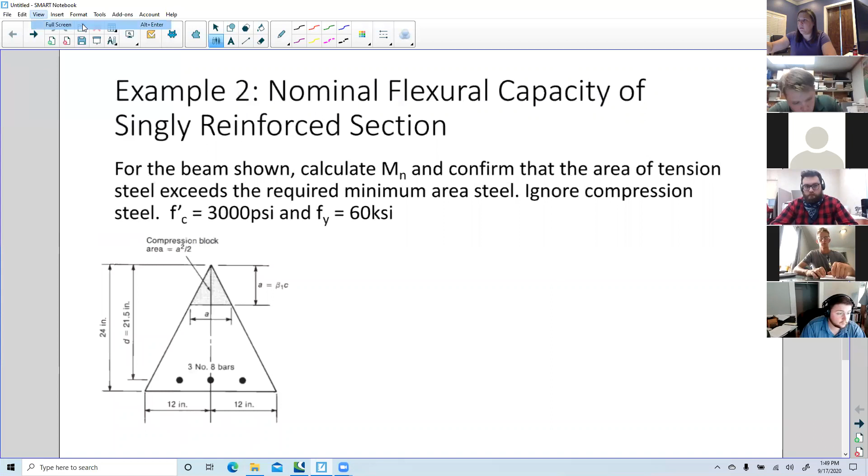So, what do we know? We know...

Our F prime C, that's our compressive strength, 3,000. Our yield stress of our steel is 60 KSI. And our area of steel, we have 3 number 8 bars, so I have 3 times the area of a number 8.

Anybody want to guess what that is? Look it up. 0.79. Yep, 0.79. Right. Again, that's one you might end up having memorized at some point. So our area of steel is 2.37 inches squared.

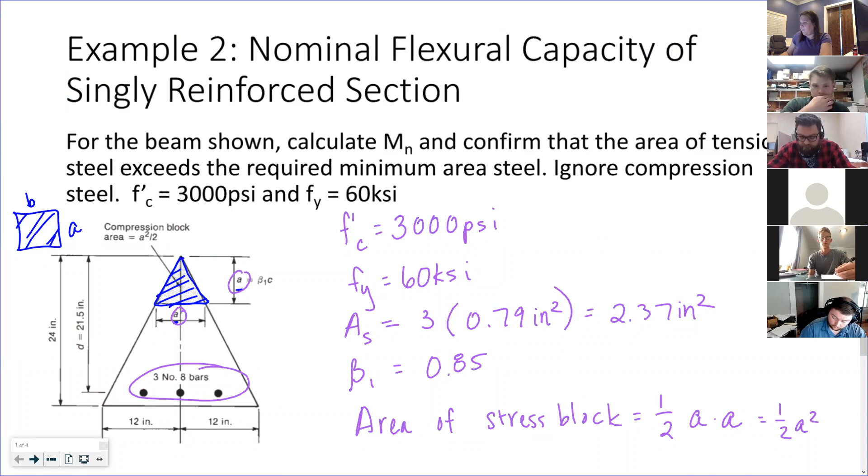This is straight out of the book, but if I look at my strain profile, I'm still going to assume that the very tip has a compressive strain of 0.003. That's the maximum compressive strain of concrete.

That line needs to, that's my steel, right? My depth of my steel. And my steel, which is luckily all in a line, we're going to assume it has a strain equal to or greater than the yield strain, so that my steel has yielded.

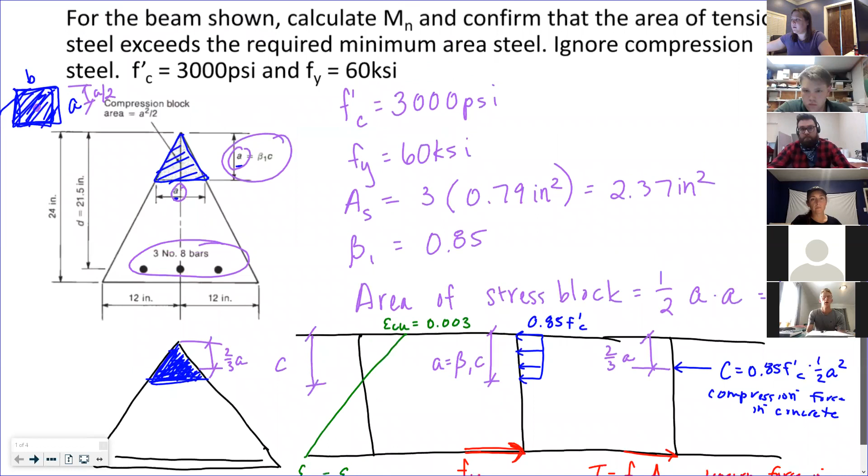Well, I was 10 minutes late because I didn't get the Zoom invitation, so I'm wondering what page you're on. Oh, it's on something I didn't give you guys. Take a minute and copy it down. It's this page right here, I didn't give it to you guys. Oh, it's one of the blank ones. Yeah, I forgot to include this. Okay, I'll just screenshot it. Oh wait, never mind, I don't know how to do that. I'll copy it down, take a picture with my phone. Gosh. I can't email it to you because I'm on my... Okay, we're good.

So we're just applying this, instead of using a nice rectangular cross section, we're looking at something funky. This is going to help on the last problem of the homework.

Okay, so my next step is I'm going to set C equal to T, because my cross section has to be in equilibrium.

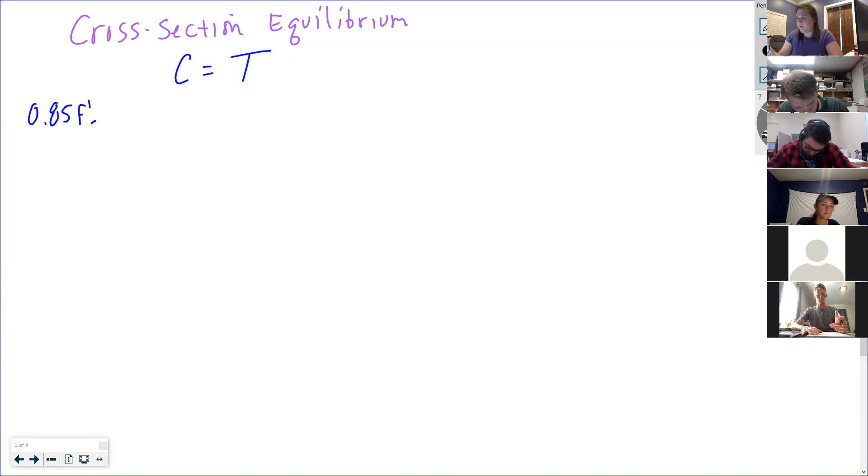So I have 0.85 F prime C times 1/2 A squared equal to AS times FY.

I guess I should say that's the C sub C for compression in the concrete. There's never tension in concrete, but there could be compression in steel.

So if I look at this equation, I know F prime C, I know AS, I know FY. The only thing I don't know is my A. I'm going to solve for that.

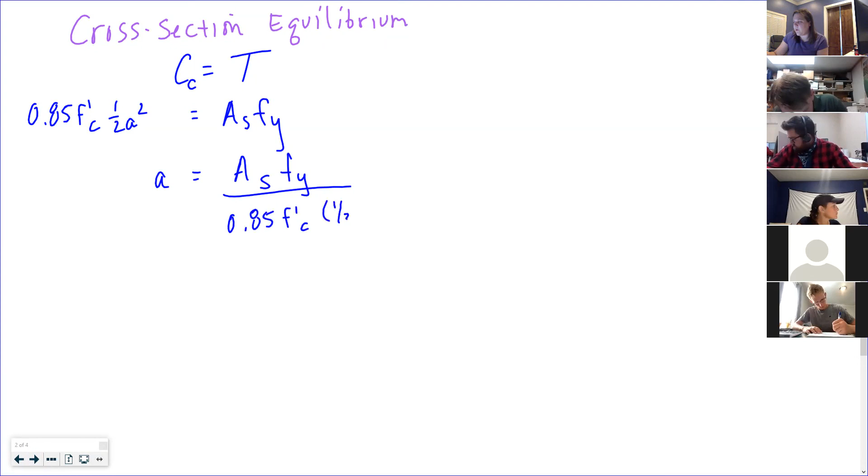My area of steel was 2.37. Yield stress is 60 KSI. I'm going to put my F prime C in KSI so I can cross them out, so 3,000 PSI, that's 3 KSI.

Should get a value of about 10 inches. Is that right?

Okay, so for rounding on homework and stuff, do you want us to go to 1 decimal, or... I typically go to 2, doesn't matter. That would be fine, this is kind of an intermediate calculation. So I would actually probably keep that number in my calculator and move on. Your final answers though, I guess you just want to the nearest KSI.

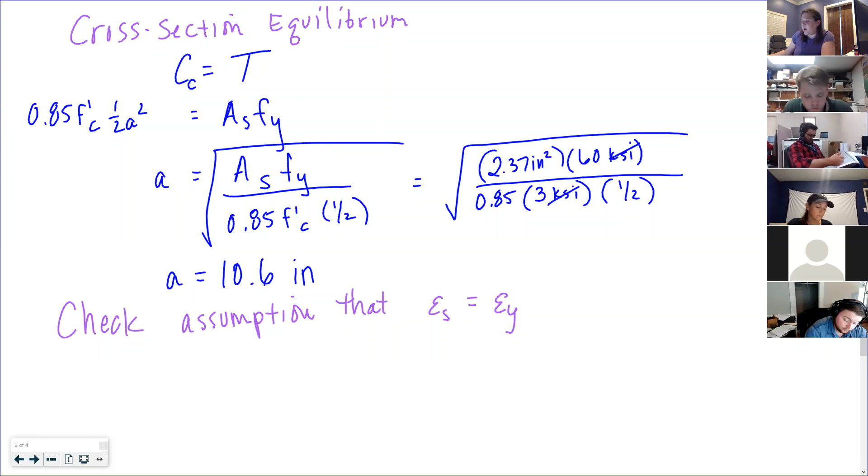You can't get away, you have to calculate A and B, or A and C, but I'm gonna do it right now. So I assumed, I'm just gonna draw this again, you don't have to if you don't want to.

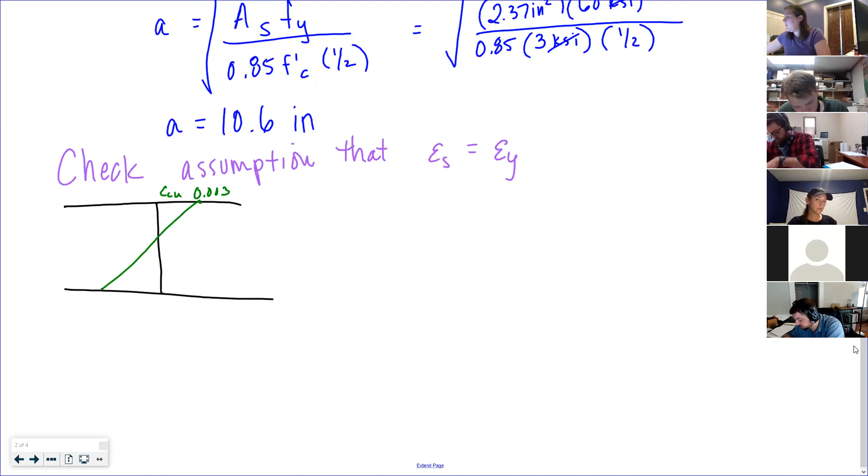I assumed a strain profile. No matter what, this is always going to be 0.003. This distance right here is the depth of my neutral axis C. This distance here is the depth from the extreme compression fiber to the centroid of my steel, which is D.

What I want to know is what's my value of the strain in my steel.

So I can calculate, right? A equals beta 1 times C. So C equals A over beta 1. I got 10.6 inches divided by 0.85. So the depth of my neutral axis is 12.4. It's like halfway down.

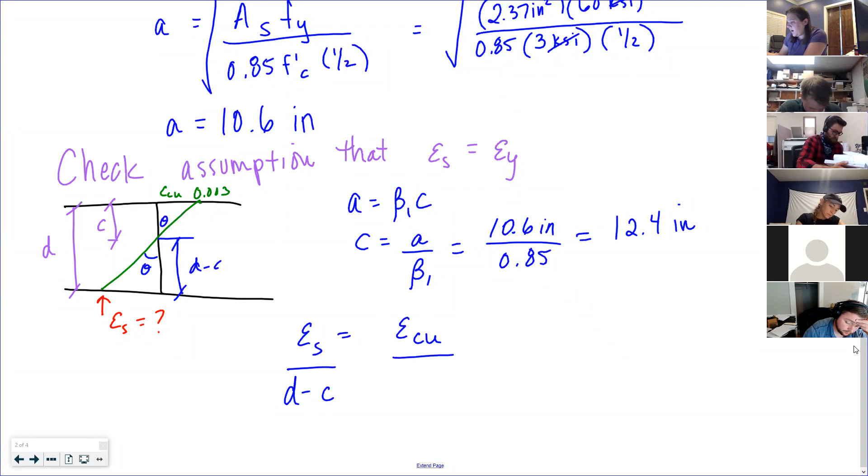So I can use similar triangles to solve for the strain in my steel. I think I wrote this down in the notes. ES over this distance, D minus C - that's one triangle, because these angles are the same - is equal to the ultimate strain in my concrete divided by C. And the strain in my steel is the strain in my concrete times D minus C.

0.003 times D, which was 21.5 inches.

Two one nine two two, however you rounded it.

So 10 decimals, just yes, please, 10 decimals. No, don't use 10 decimals. I will kill you.

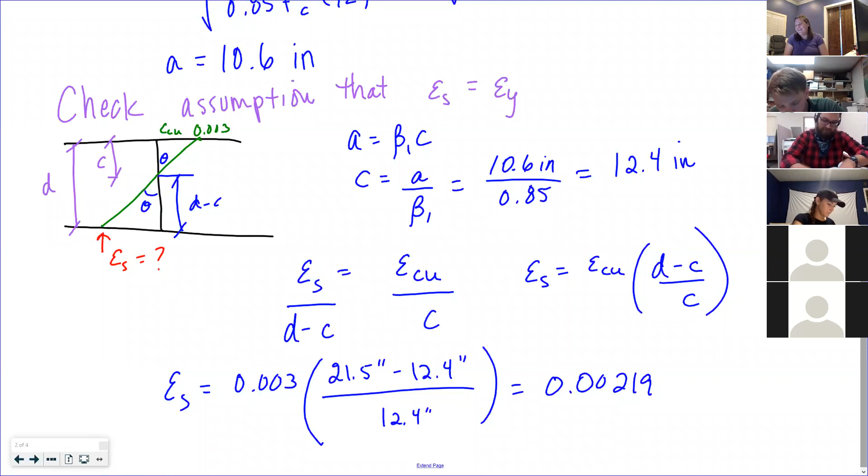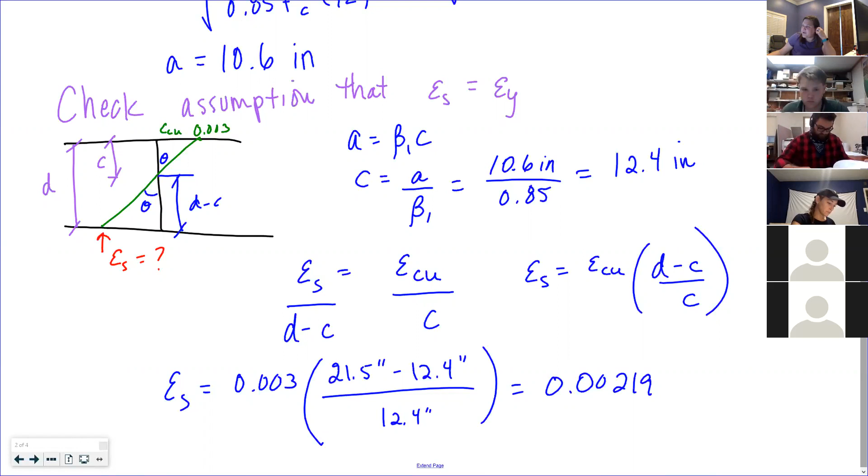So if you start to, because after a while you might remember that for 60 KSI it's 0.00207, but let's just derive it. EY is my yield stress divided by the elastic modulus of steel. So 60 KSI divided by 29,000 KSI should be that. So I just barely yielded, but I did.

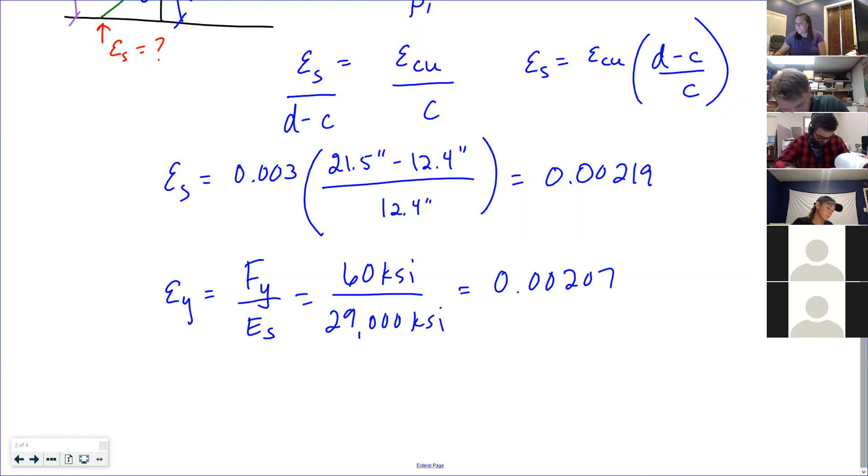All right, yes, ES is greater than EY.

And since I yielded, that means I can use the yield stress Fy. I don't have to go back and redo any calculation.

So can you talk through again what we would do if you didn't yield? What would, you'd have to go back and recalculate FY? Yeah, it would. Is it bad that I'm trying to remember?

I think you have to do an iterative process because you have to guess it, like your A, how do you recalculate it? A given though? FY is given to you.

Yes, but that's assuming your steel has yielded. If your steel hasn't yielded, then the stress in the steel is not Fy, it's something slightly less. So I went up here and calculated this A in my equilibrium, assuming that the stress in the steel, right, my tension force is really the area of steel times the stress in my steel. Since I'm assuming it's yielded, I'm assuming that's Fy. If the steel hasn't yielded, then the stress in my steel is going to be something less than that, so I have to go back and calculate a new A.

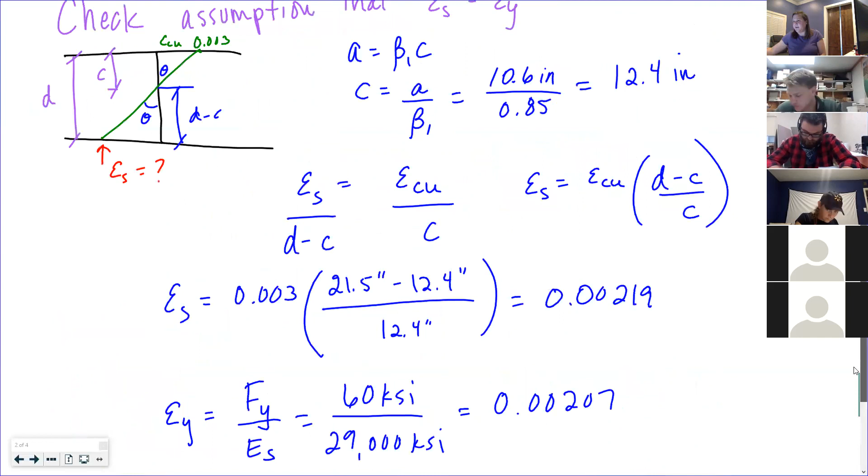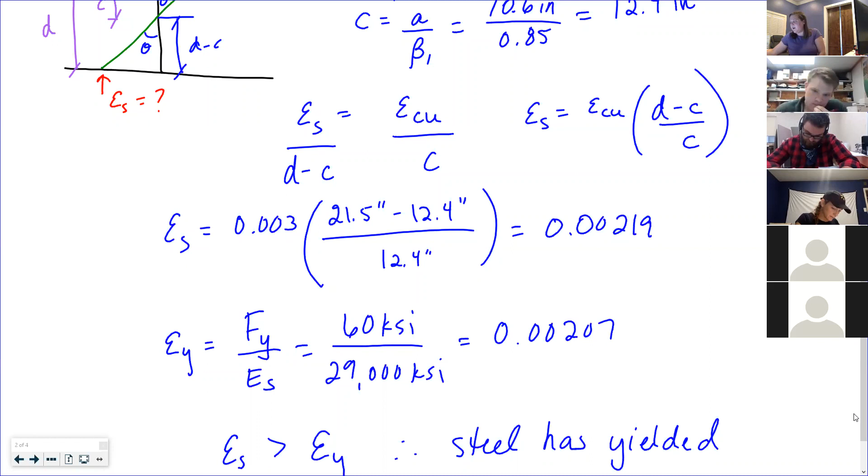Like in this instance, I would use this, or in that instance, not this instance. Okay, I have a strain. From that strain, I can calculate a stress.

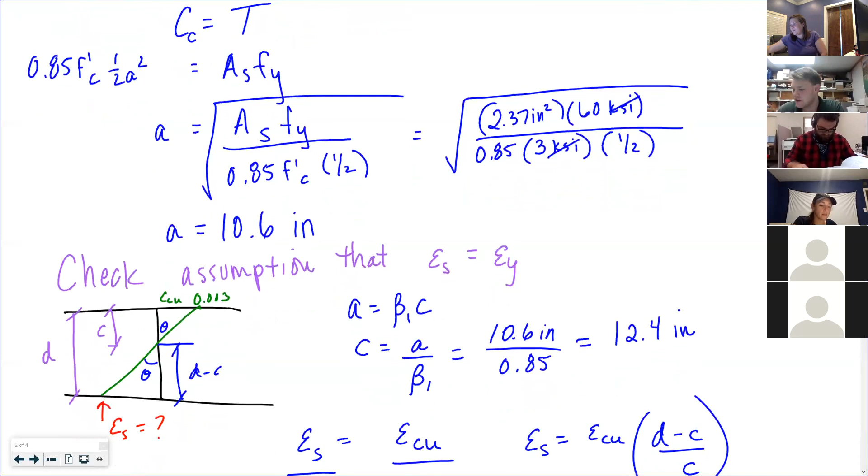Yeah, that sounds terrible. Let's not do that on a test. Well, I don't say I wouldn't do that on a test, but so we haven't done any examples that way yet, so I wouldn't make you do that just yet.

But also the ultimate goal would be that you want it to yield, because then your a tension controlled section. Because if it hasn't yielded, then you might fail in compression first, meaning you're going to have a more brittle and a more sudden failure than a ductile failure.

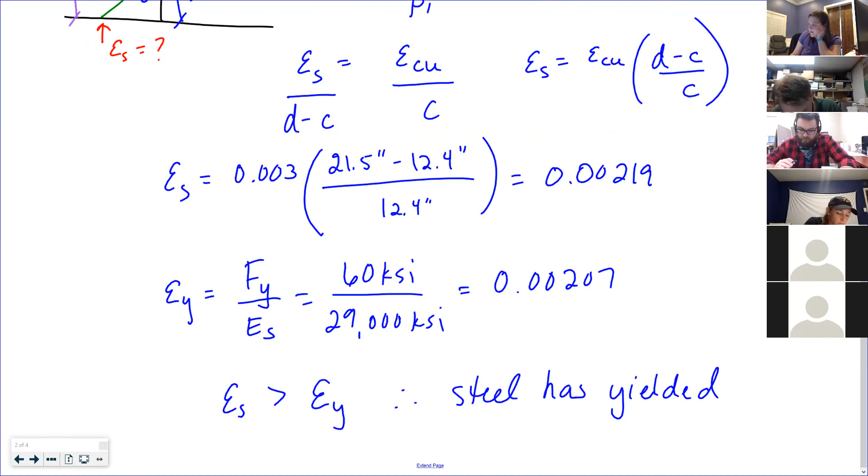Now, obviously, a concrete column, the steel is going to be in compression. But a beam, it's not going to be. So our question now, so we yielded our steel, so we can go.

We can check that we have the minimum amount. This is really something that is more appropriate when we're on the design side, but it's good to get that check in there. Right now, all we're doing is something's already designed and we're making sure it works.

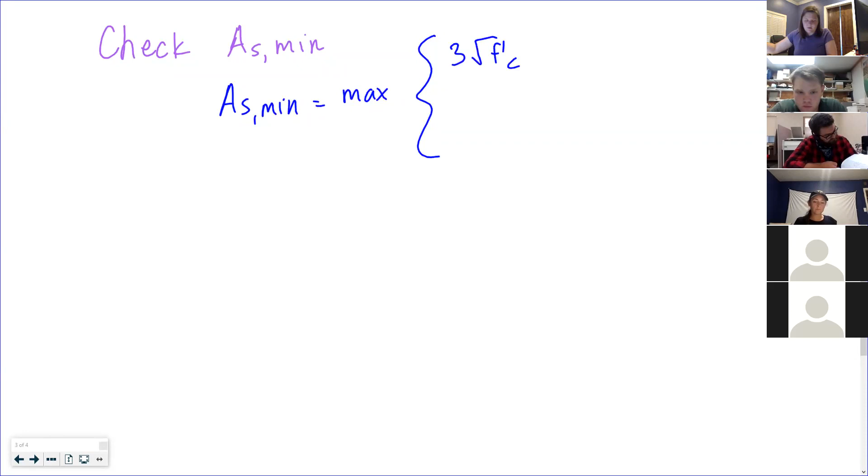So on page 135, good tab to have is our AS min. That's the maximum of 3 times the square root of F prime C over Fy times the width, or 200 over Fy.

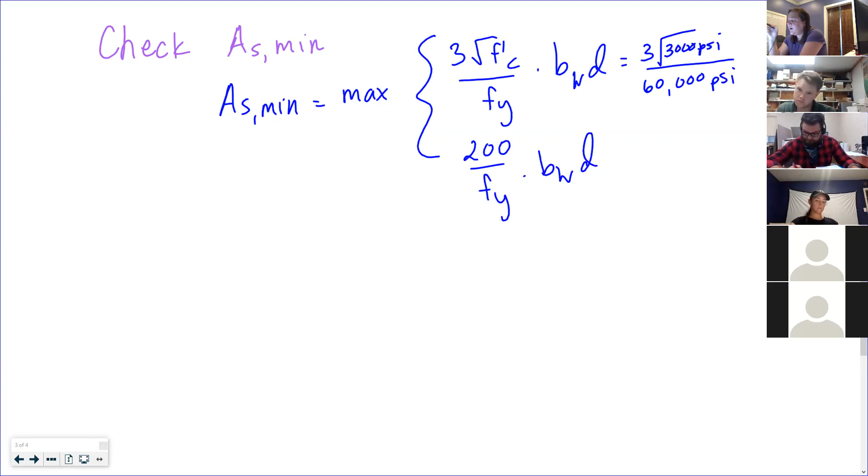So really, you need to figure out if 3 times the square root of F prime C is greater than 200. But the maximum, like 3 times the square root of 3,000 psi, and I'll say it every time: when your F prime C is under a square root, it has to be in PSI, and the answer comes out in PSI. It makes no mathematical sense, okay, but it is what it is.

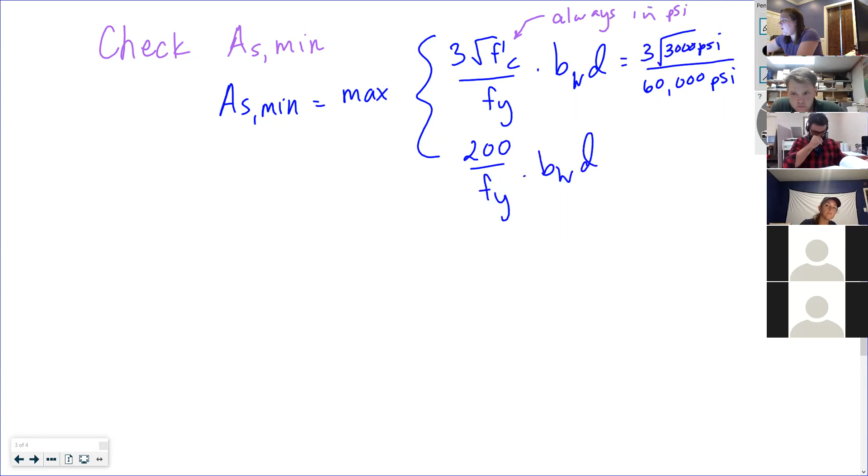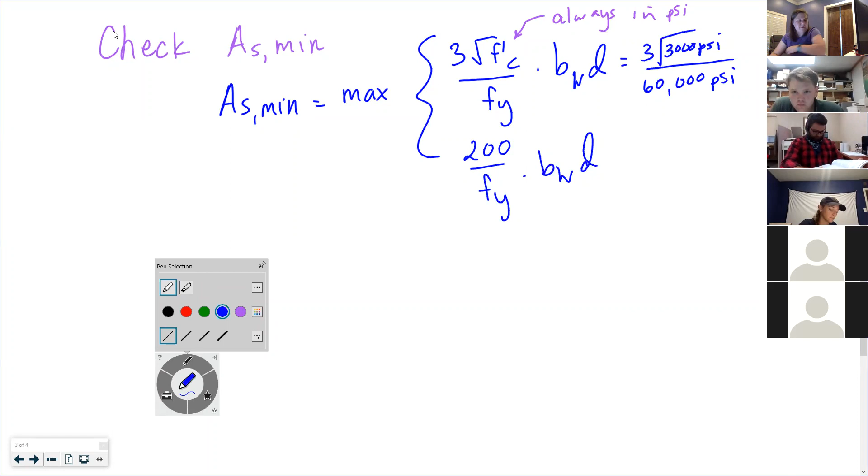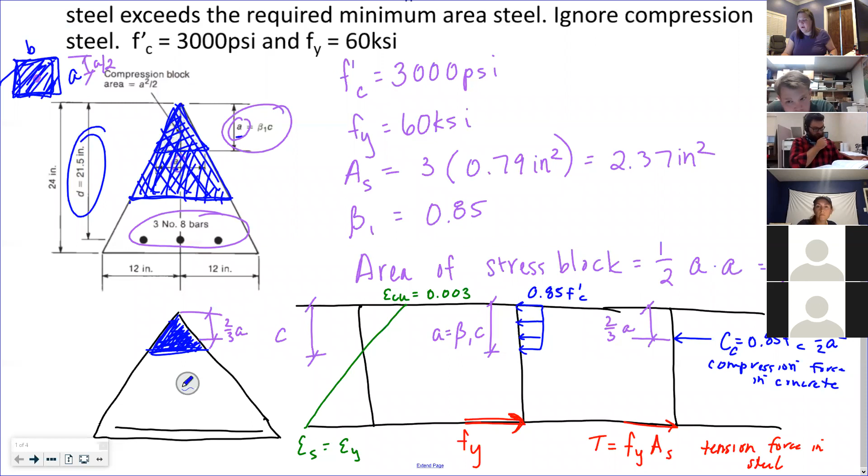And the width, well, this is a variable width. We have a triangle, but it would be safe to assume the maximum width is conservative. You could use an average width, but we can use the maximum width because that would give the highest value. So the width is 12 plus 12, 24 inches, and my depth is 21.5 inches.

Same thing here, 200, again, that's in PSI, even though it doesn't say that in the thing. So my minimum steel that I need to have, based on the dimensions and the material properties, is the maximum of those two values.

And my AS was 2.37, so I'm good there. Greater than 1.72.

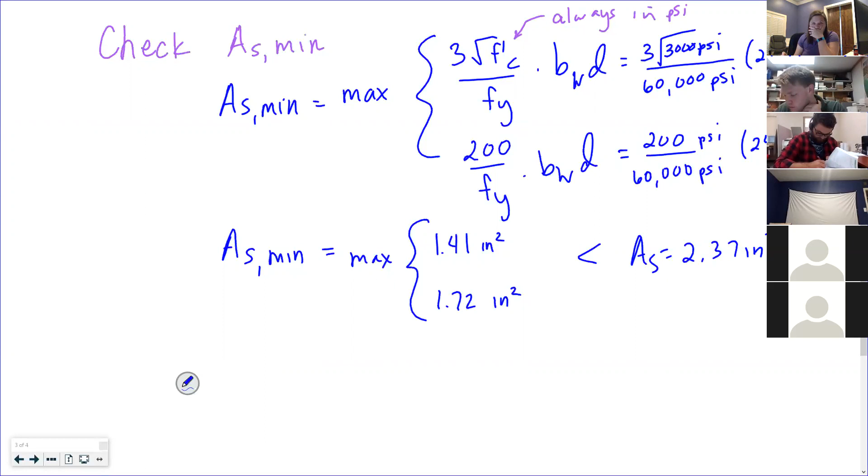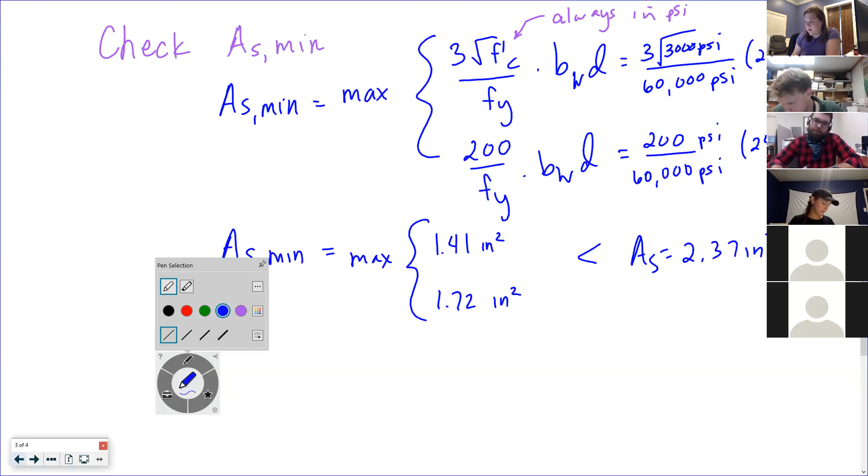Now, what they actually asked us to do was calculate our nominal capacity. And my equation for that is, I have this force couple. I have a compression force and a tension force, and I need to take the moment about one of them. The force couple caused the moment.

It's nicer to take the moment about C sub C because there's a lot less variables in the tension, at least right now. So I need to know the distance between the two, which is D, the whole overall distance from the extreme compression fiber to the centroid of my steel, minus 2/3 times A.

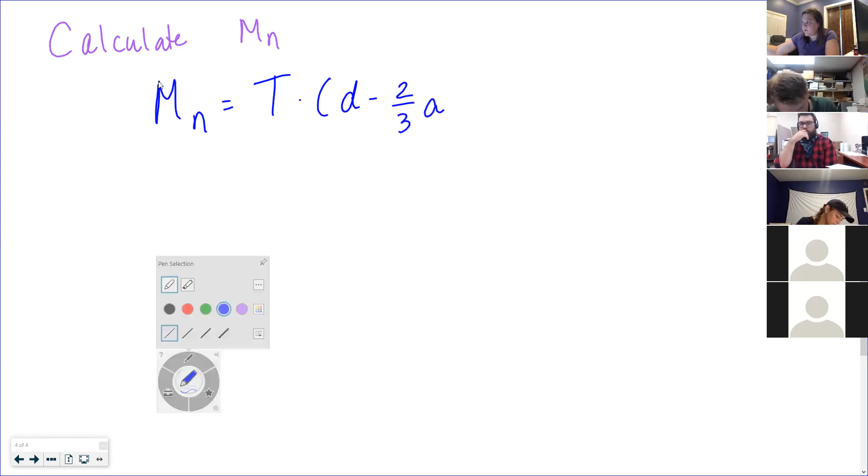Or the whole distance is D, I need to subtract that 2/3 A. That's the moment arm between that force couple. So if I take the moment about the C sub C, it would be: my nominal capacity is T times that moment arm, which is D minus 2/3 A, or AS FY times D minus 2/3 A.

So my area of steel times the stress in that steel, which is the yield stress, so 60 KSI. The moment arm, which is D, 21.5 inches, minus 2/3 A, which was 10.6 inches.

2.37? Yeah, 2.37. Making sure that I got the right number. Got like 2052, something like that.

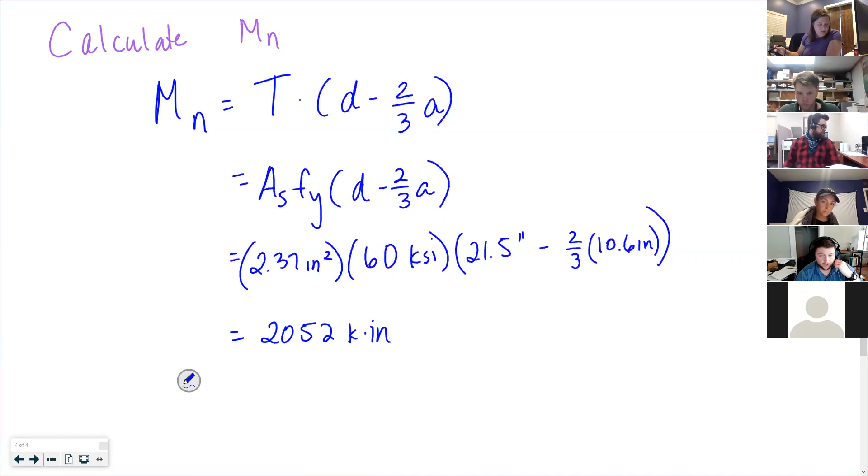Oh, thank you. Mm-hmm.

If you're following along in the textbook, I found an error with their units. They have pound-inches, but it should be kip-inches. If I have kips per square inch, that unit cancels, leaving kips times inches. Divide by 12, and you get 171 kip-feet.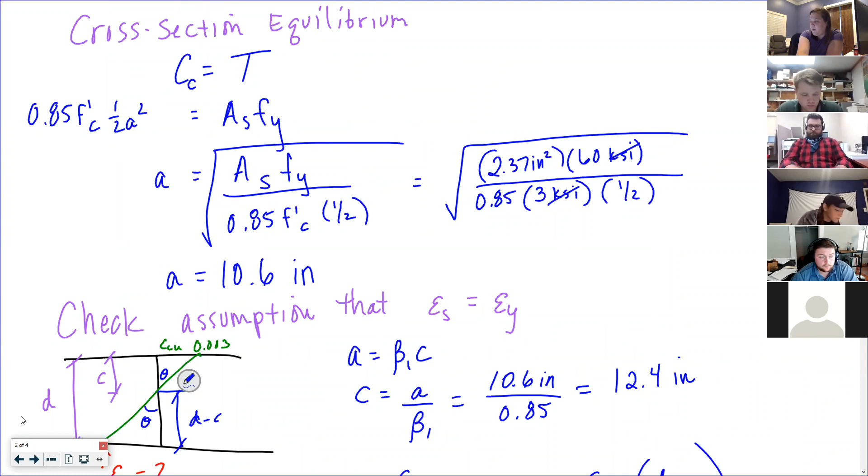As a result, some things change, but the principles are the same. It's still 0.85 F prime C, but the area, instead of being AB, is just 1/2 A squared. The location, instead of A over 2, is 2/3 A, because it's a triangle. This just means a slightly different equilibrium equation and a slightly different moment arm. Instead of D minus A over 2, now it's D minus 2/3 A.

So did you use 10.6 in your calculation, or did you use the full number? I used 10.6. That's why I'm asking, because I would have gotten 4 kip-inches more since I used the full number for A. That's okay.

You can use like 10 digits if you want, it makes a difference, doesn't it? But what would that be like? Still rounds to 171 kip feet though.

2052, or is that what you got? I got 2056 and some change. Right, divided by 12, it's still 171.

And if you're that close, like if your maximum moment that you need to carry is 2059, maybe you should change some stuff, right?

Because we're gonna multiply this by phi next. That's gonna be the next little video to watch, because that's what you have to do on the homework too, since the phi factor varies depending on if it's tension controlled or compression controlled.

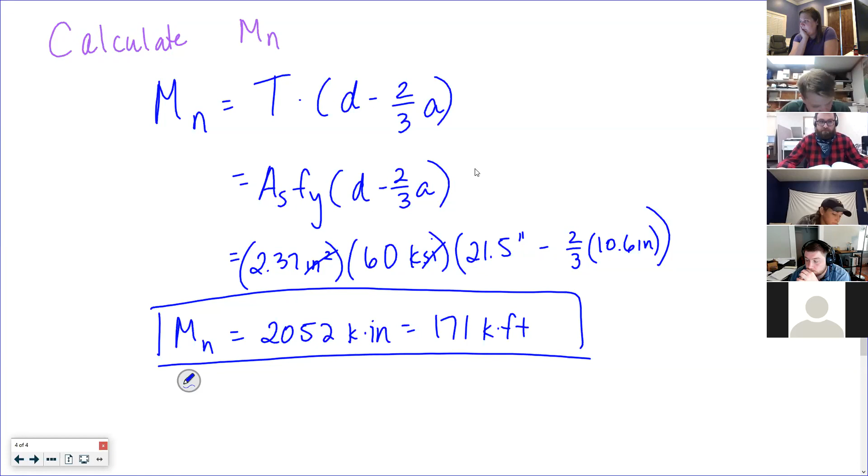So does anybody have any questions about all this that we haven't answered yet? This is, like I've said multiple times, seriously concrete right here, this little profile stuff. You're gonna get familiar with it by the end of the semester.

Like I said, this was actually on my concrete exam, and we'd never done an example like it or anything. So it was super fun, like letting me just test your learning, right?

Well, that's all I have. I totally would have used the equation for a rectangle, and I would have thought I was right too. And the one in the homework isn't an equilateral triangle, so it ends up being a little weird there. You gotta figure out an equation for the width versus the depth.

If you guys get all the way down to the end and just find the nominal capacity, that's fine. So, yeah.